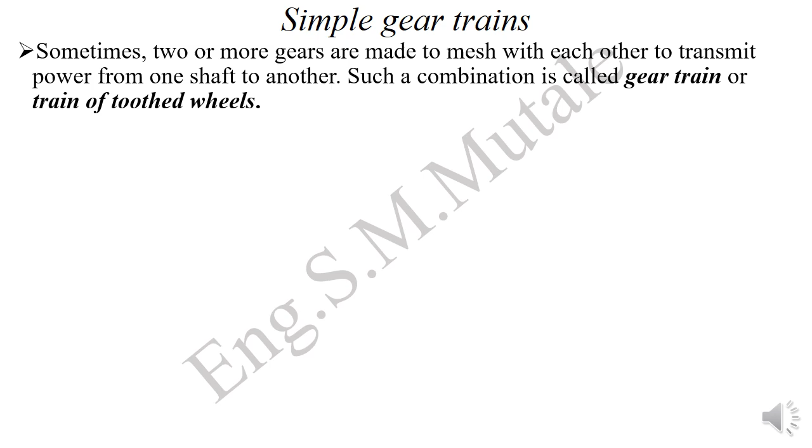Sometimes two or more gears are made to mesh with each other to transmit power from one shaft to the other. Such a combination is what we are calling a gear train or train of toothed wheels. So these are the gears there in a combination which we are calling a simple train.

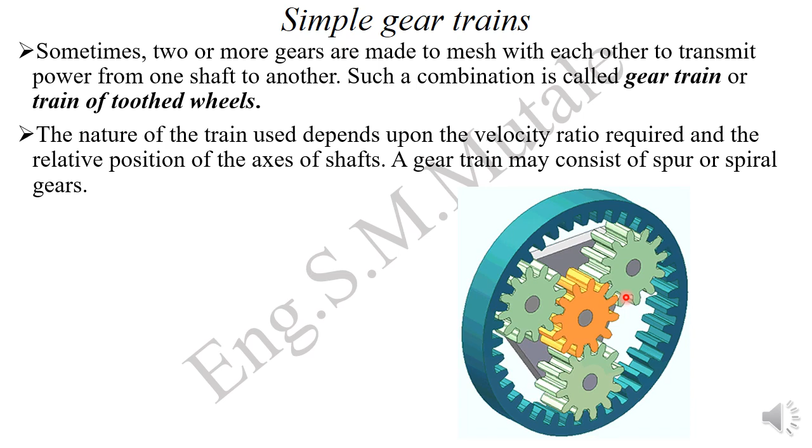The nature of the train used depends upon the velocity ratio required and the relative position of the axis of the shaft. So a gear train may consist of spur or spiral gears.

So under simple gear train, when there is only one gear on each shaft as shown below here, which is this one here, this one is what we are calling a simple gear train. There are a number of gear trains, but a simple gear train is one where on the shaft there is just one gear.

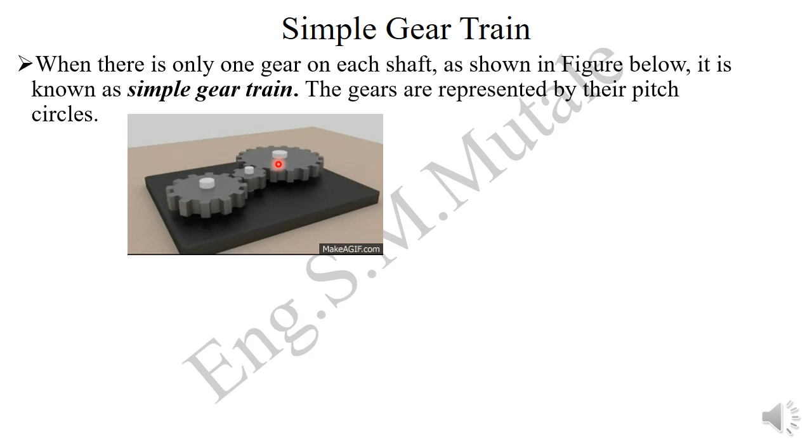As you can see, this shaft has just one gear. This shaft has one gear. That shaft has one gear. So such a combination of gears is what we are calling a simple gear train.

When the distance between the two shafts is small, the two gears, gear 1 and gear 2, for example, this one and that one there, are made to mesh with each other to transmit motion from one shaft to the other. Gear 1 drives gear 2; as you can see, as gear 1 rotates, it's driving gear 2.

Therefore, gear 1, which is rotating gear 2, we are calling the driver. And the one which gear 1 is driving, we are calling the follower or the driven. The same applies to gear 2 and gear 3: gear 2 is the driver, and gear 3 is the follower or the driven. Though this one is an idle gear, you'll understand this later.

So in such a combination, where this one is driving that one, the one which is driving the other is what we are calling the driver, and the one which is being driven is the driven or the follower.

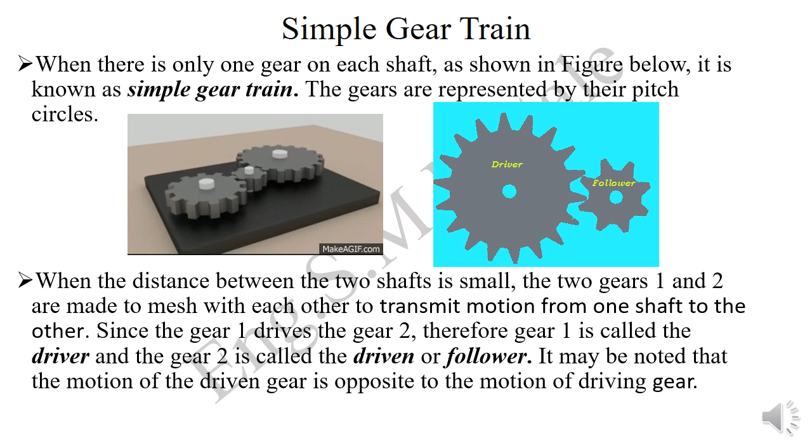So we have the general formula for the gear trains. You multiply the speed of gear 1 times the teeth of gear 1. This should be equal to the speed of gear 2 times the teeth of gear 2. This should be the same as the speed of gear 3 times the teeth of gear 3. These are the three gears. If you have many, just go on like that.

From this we can derive two equations. We have the speed ratio, which is speed of gear 1 divided by speed of gear 2. This should be equal to the inverse of the teeth, so teeth of gear 2 divided by teeth of gear 1. If you take the reciprocal of that, you have the train value: speed of gear 2 divided by speed of gear 1.

This should be equal to the teeth for gear 1 divided by teeth for gear 2. If you're relating these two gears, you consider this as gear 1 or that one gear 2. So for two consecutive gears, you have that. Or for the first one and the last one, these are the two equations derived just from that.

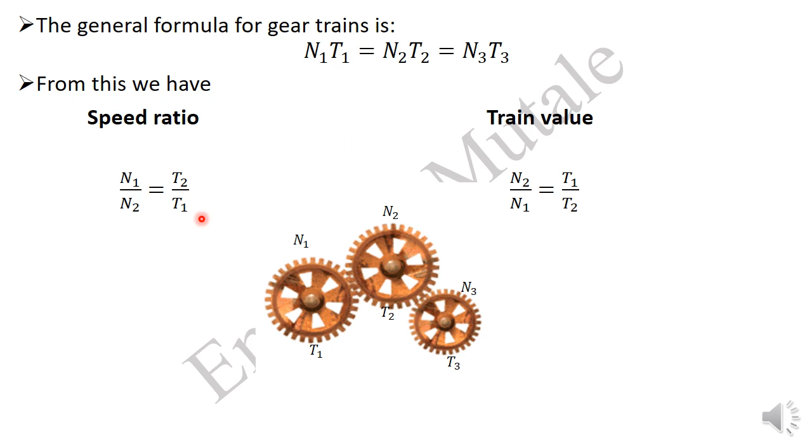So you can equate this and this, and then from this you can have the speed ratio, or you can equate this and that, or that and that. So for this we equated this and this, and then we are able to derive the speed ratio and the train value. Let's look at an example.

So a simple gear train consists of the driving gear, intermediates, and the follower as shown, which is this one here. So you have the driving gear, which is this one. Then there are gears in between, which we are calling intermediates, and we've got a follower there at the end. So we get the values of x, y, and z, which have been given there from that table. So this table is showing the speed of gear 1. This is gear 1. The speed has been given to be 900 revs per minute.

Then you've got gear 2. You've just been given the number of teeth. The speed hasn't been given. Gear 3, number of teeth. Speed is not there. Gear 4, number of teeth as well. We don't have the speed. So I want us to calculate the speeds for these gears, given that they have different number of teeth.

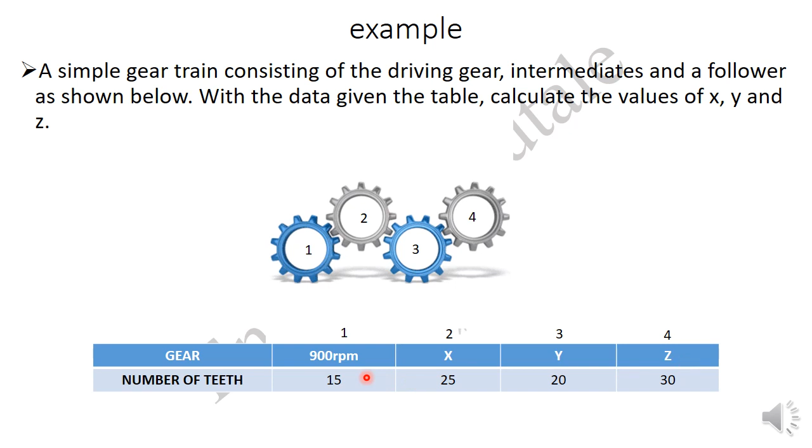Yeah, you can view them as having the same number of teeth, but this was just a GIF which I used, but the actual information is this one here. So let's try to calculate the speeds there. So on our solutions, this was the table which was given. We have for gear 1 you have that, gear 2 you have that, gear 3 as well as gear 4. That was the information which was given there.

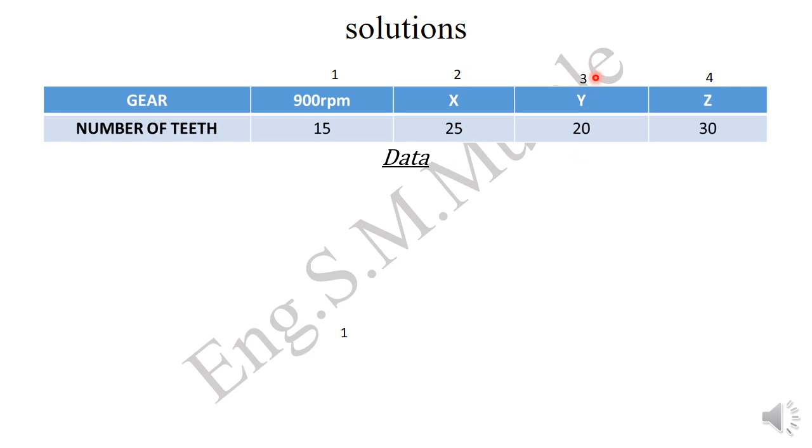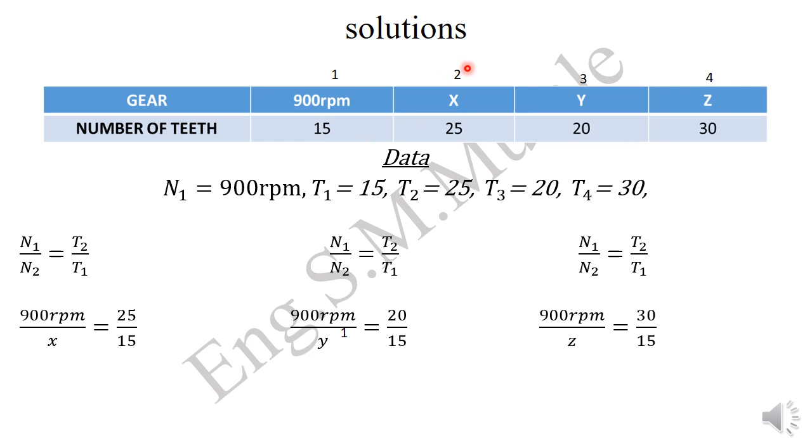So from that data, we have N1, T1, T2, T3 and T4. So we can look for the unknowns, which are these N2, N3 and N4, X, Y, Z. So from the formula there, the first one has everything. It has the speed and the teeth. Then for the second one there, you only have number of teeth, but we don't have the speed, so you're going to have that. For the second one you have that, third one you have that. So from those we can now calculate what you're looking for.

So for the first one, we have everything. We have N1, which is 900 revs per minute. N2, the speed there hasn't been given, it's X. T2, number of teeth there is 25. T1, number of teeth is 15. You're going to have that. If you come to the second one, you have this one which has everything, the 900 as well as the 15. But if you look at the T2, it's been given, it's 20. N2, we don't know, it's the Y, which is the speed we are looking for.

Same applies for this one. You're just equating this guy to that one. So you're going to calculate the values for X, Y and Z. For all of them, making X the subject of the formula, you're going to have 540 revs per minute as the speed for this gear. Y, 675 revs per minute, which is the speed for that gear. And then Z will have that. So this gear will be rotating at that speed.